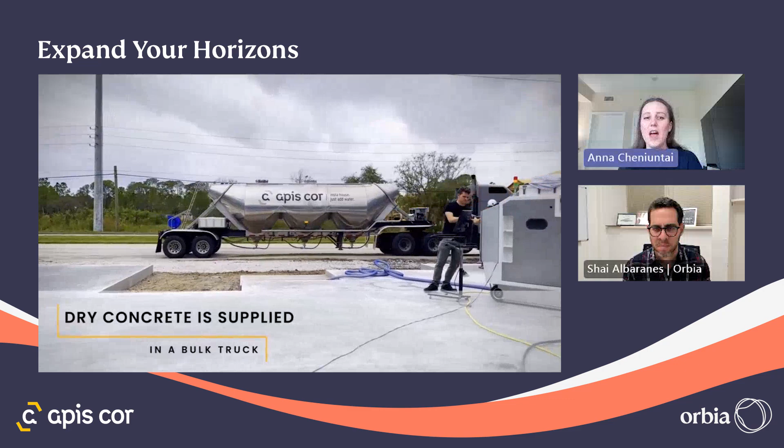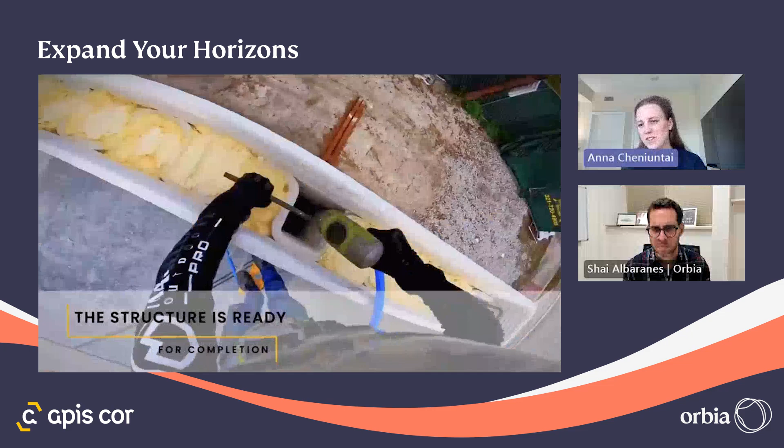And then once you have your construction documents and design approved by the building officials and building department, then you go and start construction again in the same way as you would start it with a traditional type of building. So first you build the foundation, concrete slab, as we call it here. And that's a pretty quick and easy process. We don't see the benefit of using a 3D printer for that because it's still faster just to pour a lot of concrete, and then it's done in a couple of days.

And once the concrete slab is ready, you wait maybe like 3 days so it gets all of the strength, and then you roll out the 3D printer and you start printing the walls. At the same time, you do the reinforcement and insulation. Our walls are not empty inside, because this process is not that clear, but we do reinforce the walls. And then you proceed with all of the rest of the parts like a roof, windows, mechanical, electrical, plumbing, everything like that. And then you get your house done.

Yeah, and just to get the feel for the speed. Maybe there's a certain speed that you can do today, and something that you plan to achieve 2-3 years down the road. But a house like this that we see in Florida, how long did it take Frank to build this house without the roof and the internals, just the external?

Yeah, great question. So for the walls here, and it's a pretty big house, it's 2,400 square feet or 240 square meters, with a lot of interior walls. Just the printing time was 7 or 8 days. But that was spread within like 1 month because we were doing some of the testing, the G-code, learning and everything like that. So currently the speed is 1 week per structure of a house.

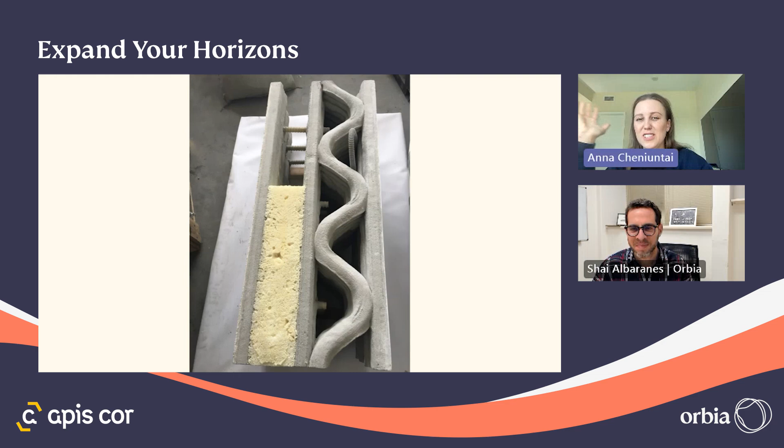But currently, we build a wall like this. And this is an 8-inch wall. So it's the same as the concrete block wall right now. Let me show you this. Here, for example, this is the building in Dubai. This, I believe, is maybe a 10-inch thick wall. And you see how much reinforcement we put everywhere.

So the walls can be as thick as you want, as long as your engineer is happy about that. And then you install the doors and windows like this. We just don't print here. The printer knows where the wall continues and when to stop, because a door is going to be installed. So that's not a big problem, actually. Yeah, and here you see the printer printing, and how big the building was.

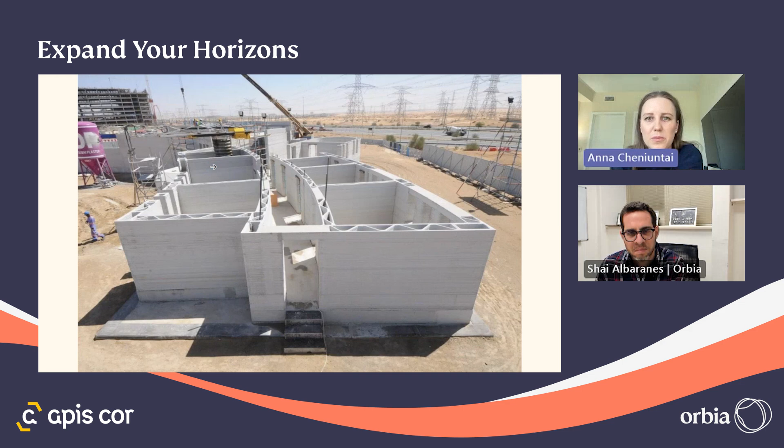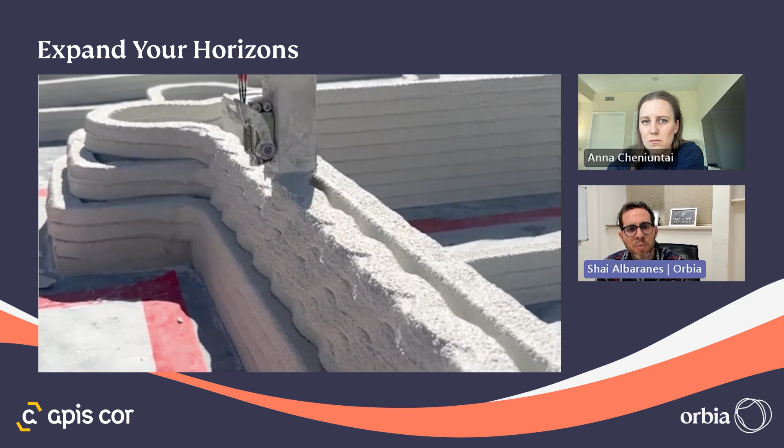Yeah, I wonder from a cost point of view, okay, if you had to build this thing not with a robot but with labor, what would be the ratio between the cost of the concrete and the cost of the labor? Like, is it completely off balance? Great question, actually. So labor is the bigger factor here.

So materials, if you build at scale, this is very important. If you're a pretty big developer and you build at scale like 200 homes, 500 homes a year, you of course have a better price for the materials, crew and people all the time available for you because everybody wants to work with you. And also what is really important is that you can schedule out all of the activities to complete the house very efficiently.

So the big home builders, they're very good at scheduling. Once the concrete slab is ready, walls are ready, and then the next day the crew comes with windows, next day roof and everything, inspection, everything like this. So for them, costs may be the same. And they say even if we save 5%, but we can significantly scale up the process, it's already a big win for them. Because remember, big home builders really need to build more homes and they need tools for that.

But if you're a smaller builder, you don't have this luxury that you come to the subcontractor and say I'm going to have 100 projects for you to build. Let's say you only have 10, 15 or 20 per year. This is where all of the problems start, and you can't really schedule the roof after the walls and everything like that. For the smaller home builders, it's like a 50% cost savings on the walls. Just on the walls you can achieve, yes.

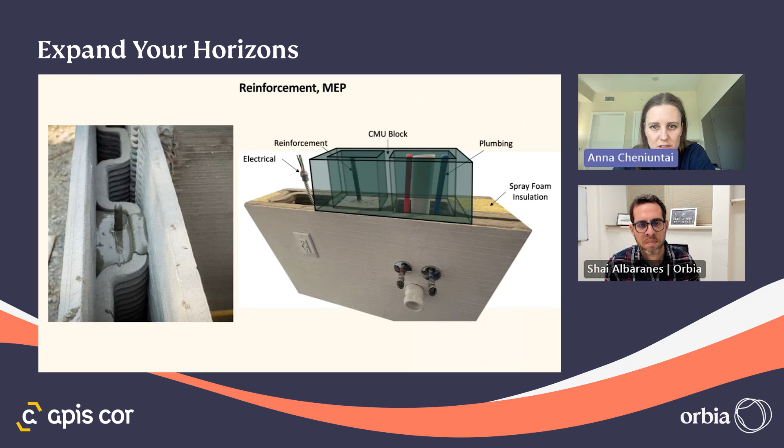Just a second. Where is this? Yeah, so this is also what makes us very different in the market. This is the quality of walls, how we print. You see the surface is pretty smooth. You just see the strips where it's printed. Other companies, they print really sausages, as I call them. People aren't really attracted to live in houses like that. Plus, they're very big dust collectors. So you need to apply a lot of stucco just to make the wall smooth.

We don't need to apply this stucco. And it's something where home builders can also save a lot. They say, oh, your walls, we can just paint them. And sometimes you can save like $7,000 to $10,000 or even more per house just for the exterior stucco. And stucco is also a problem here, because it's labor. And if it's not installed properly, then in 2-3 years, it's all cracked and you need to rebuild it, fix it.

And sometimes it's like $100 million lawsuits, depending on how big the neighborhood you need to fix is. So this is another item in your construction costs where you also can save money. Impressive.

So how much more time do we have? Because I can stop and we can answer questions, or I can continue. Let me know. Well, you can take a few more minutes, because I was already asking questions in between, and I hope I answered some of the questions already. So feel free to take another 5-7 minutes to complete the presentation, and then we'll take more questions.

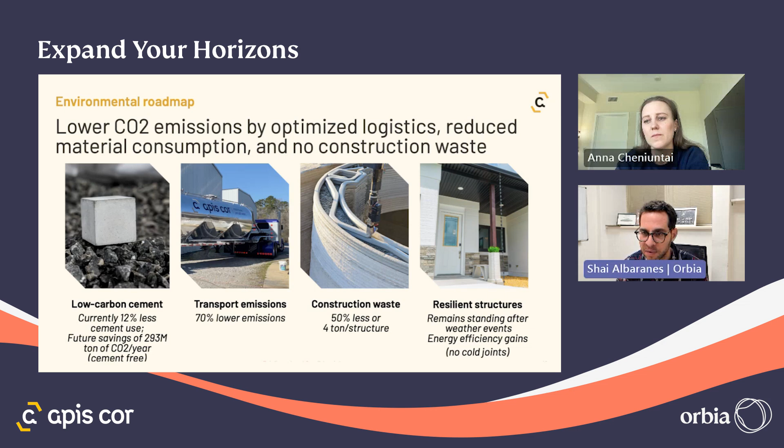Yeah. Nice. Okay, so we have time for a couple more questions. Let me try to cover as much as we can, unless you have anything else that you want to cover.

Up to 3 floors, basically, because it's a limitation with the building codes. But we can also figure out how to build high-rise houses and buildings. It's just a different type of calculations and how we reinforce the walls.

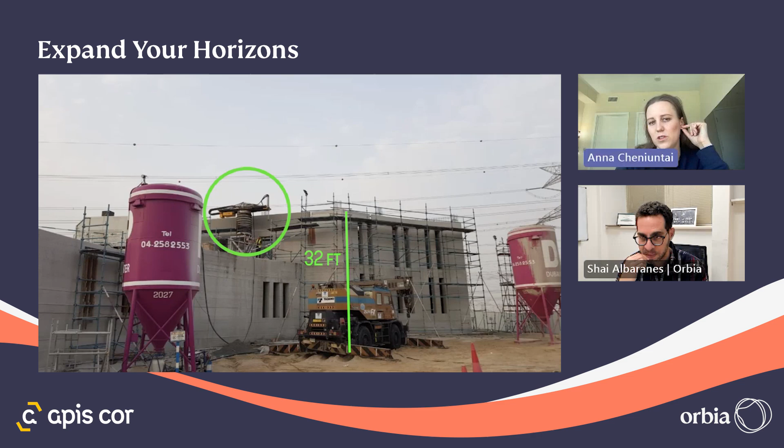And here you see that actually each floor in the Dubai building was 5 meters, 4.5 meters tall. The printer could print only 3 meters tall. So to achieve the full height per floor, we fabricated a very simple metal frame, and we put the printer on it, and this is how we extended the print height.

And lastly, that also opens a lot of market opportunities and applications beyond single family housing, because we can print higher walls and we are not limited in how big the structure can be, square footage wise.

We can 3D print sea walls, and sea walls are very important right now because with the rising sea level, a lot of cities are kind of sinking. New York and other coastal cities spend a lot of money, hundreds of billions of dollars, just to reinforce the coastal area. And again, it's a very cost and labor intensive process. We can 3D print it. We can deploy hundreds of printers along the coastal area and 3D print it quickly.

And also all of the different shapes of the sea walls will help marine creatures to actually live on these sea walls and create a better bio environment. And of course, all of the infrastructure projects like noise barrier walls, tilt walls, we can fabricate them quickly on site. So I just wanted to give the perspective that this technology is not just for single family houses. Our technology has a very broad application, as long as you have enough land to 3D print structures. That's the only limitation for us, the land.